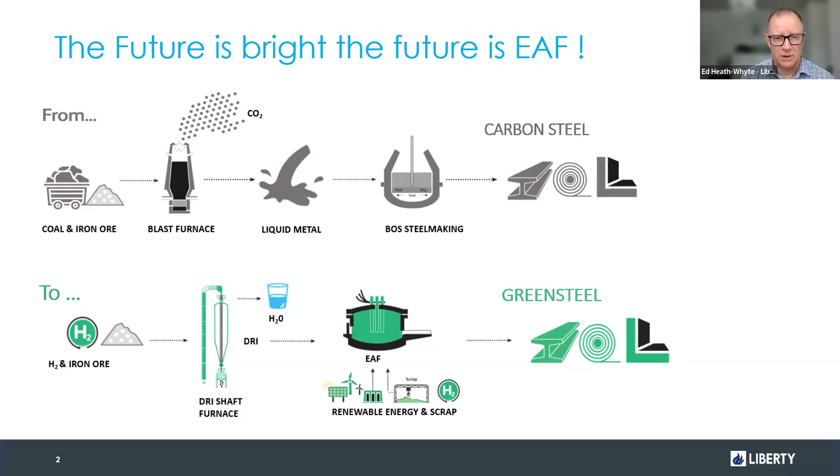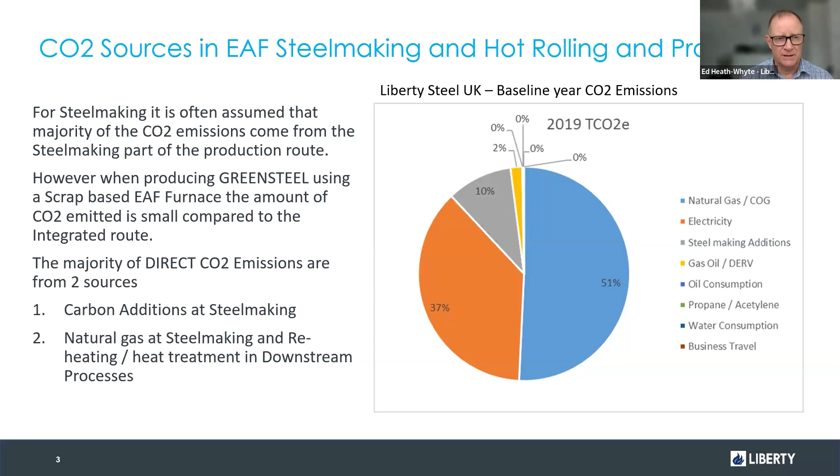So for Liberty Steel UK, our baseline year was 2019, and you can see there the sort of split of our baseline CO2 emissions. This is for steel making, but also our downstream processing in hot rolling mills. So 51% of our emissions were from methane, natural gas, and some coke oven gas. Then 37% electricity, so a scope 2 emission. And then 10% is the sort of steel making part of that, so the addition of carbon and alloys. But for the direct CO2 emissions, the two major ones are carbon additions at steel making and the natural gas used within the processes.

So the sources of CO2 in an electric arc furnace are obviously electricity, which is supplied by the national grid. That's an indirect emission. But for our direct emissions, we've got natural gas or LNG, oxy-fuel burners, ladle preheating, tundish and shroud preheating, and the cut to length in the bloom and billet.

And then we have some actual carbon additions, so the electrodes that are used to transfer the electricity for the melting. We make carbon additions of coke, coal, injection carbon and carbon wire, and also within the alloys we use - ferrochromes, ferromanganese - all of those have carbon within them as well. So within the mass balance of the steel making, we retain some of the carbon in the steel, but we also emit the CO2 from the process.

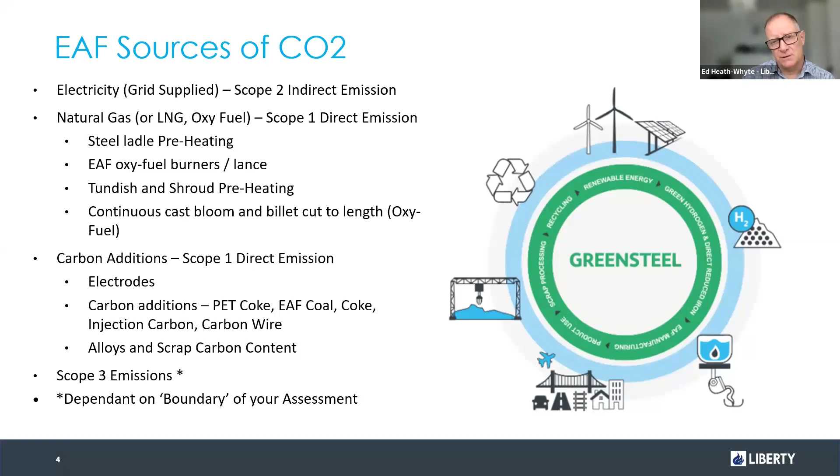And then as we process steel further downstream in our rolling mills, we reheat the steel up to 1300 degrees centigrade. We use reheating furnaces, soaking pits, walking beam furnaces, walking hearth furnaces. We do heat treatment of steel, we cut steel, and we use gas oil as a backup sometimes, although not so much anymore. So we have quite a large usage of natural gas, particularly for reheating steel, and that's not generally understood. People think it's all in the steel making, but actually the downstream processing has a considerable amount of CO2 emissions.

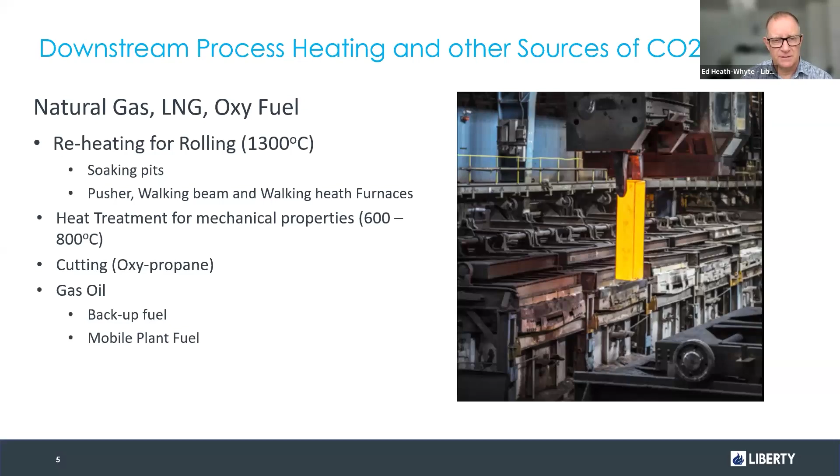So as a company, as a group, Liberty Steel Group have a climate neutral by 2030 ambition and strategy. And this is an illustrative approach to how we are approaching that.

So first of all, we'll tackle efficiency of process, making sure all of our processes are efficient in the use of energy and fuels. We'll fuel switch, from coke oven gas to natural gas, and that's happened. Then if there's going to be a new grid or grid mix, we'll switch to that. But we also look at where we're going to get hydrogen from. Our ultimate decarbonisation is to use hydrogen for our reheating and various processes already mentioned, and that will replace the methane. We're also doing things like using biomass or biocoke to replace coal and anthracite.

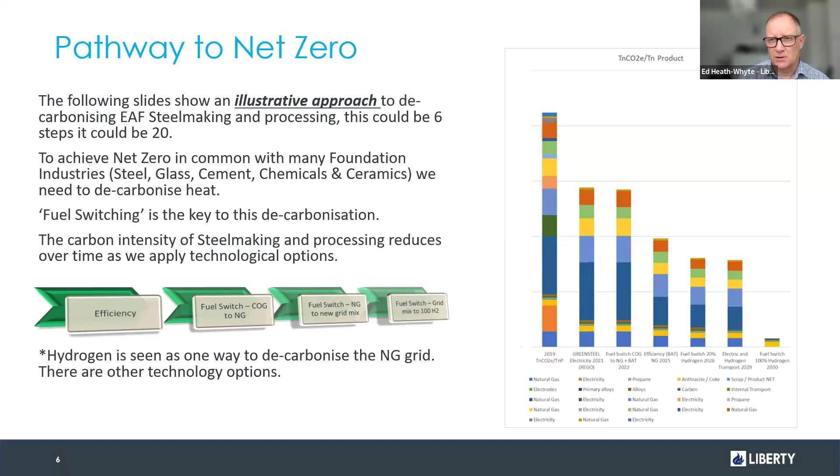So this is where the sources of CO2 come from, or was emitted from in the process. We have different sources of carbon, and these are all from our UK ETS registry. We calculate every year our tons of CO2, those are verified, and we report those through the emissions trading scheme. So we've got carbon additions, coke and coal - M1 and M7 - natural gas, propane, gas oil, electrodes, alloy additions, primary alloys, and a small amount of acetylene. You can see from all processes that natural gas is the biggest, and coal is probably the second largest, and for steel making similarly.

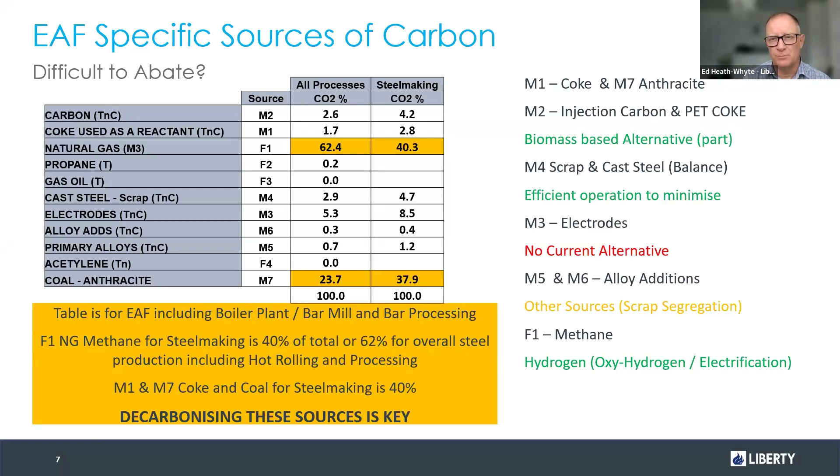So the key for us is to replace that methane, that natural gas, and that's what I'm talking about today. So the way we're going to do that is primarily through the use of hydrogen, but we will also electrify some processes.

This slide shows the East Coast Hydrogen Network. This is a project, and Cadent is one of the partners in this project, and we are one of the stakeholders. You might be able to see from the diagram that we are in between Rotherham, Doncaster, and Sheffield. So we are expecting to be on a hydrogen pipeline probably in the early 2030s, 2031, 2032, and we would expect to see pipeline hydrogen in that sort of timescale.

And that hydrogen, as it stands at the moment, will be produced on the East Coast, either from methane steam reformation or through electrolyzers through wind power. This diagram shows where the energy is coming from, from wind, but also where possibly any carbon storage could be done, or usage of that carbon to make other things. So that's what we believe our strategy is going to be at the moment. This is as far as we can see.

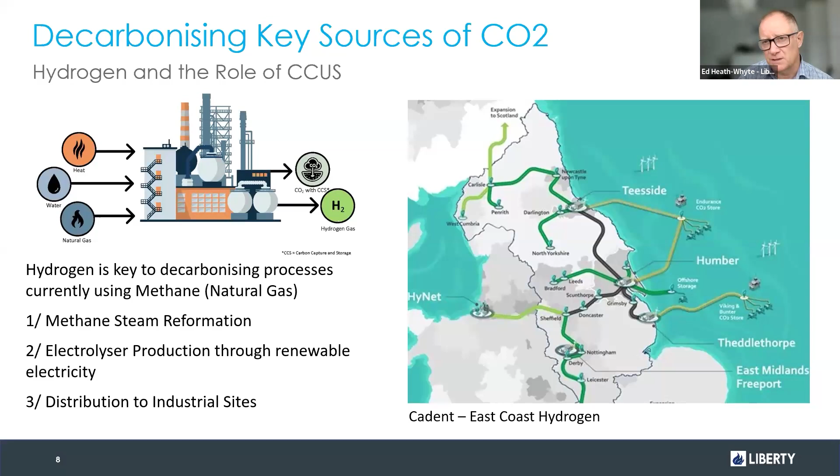And we need the actual, because the amount of methane we use, we really need it to be from a pipeline. We could do it on site, but that could be a big issue for us. It's not our core business to make hydrogen - our core business is to make steel - and therefore we prefer to get our hydrogen through a pipeline. So we expect that CCUS will be used in those processes that produce the hydrogen and then provide it to us.

However, we've also done some research through the SUSTAIN project. Professor Peter Styring and George Dowson have got this rig - I'm not going to go through all the writing - but it's a test rig in a trailer that was hooked up to our Brinsworth strip mill hot mill furnace. So we did a trial there, an industrial trial, just to prove this unit. It was the first trial of the unit, and we did this last year.

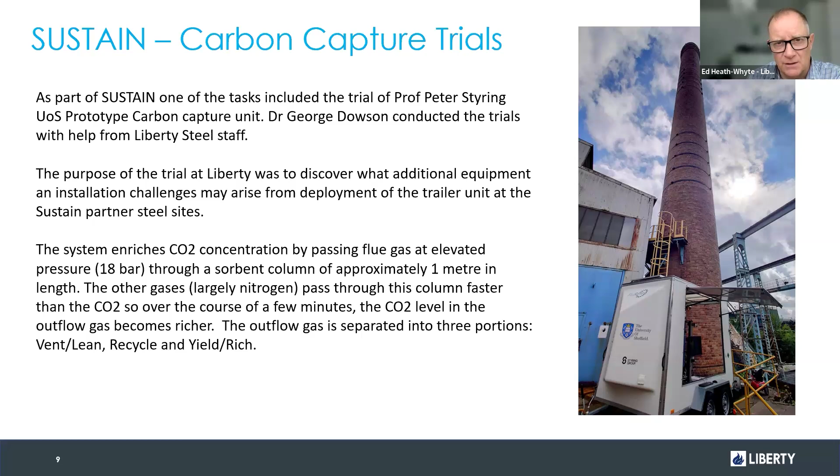So we were successful in taking the flue gases from the stack and passing them through the process. That provided quite a lot of learning opportunities for George and Peter in terms of how their rig operated and some of the issues they might have. We did find that the actual CO2 content was quite low in that stack, possibly due to air ingress between the stack and the furnace, but it was only about maximum 2% CO2. However, they managed to capture that and also concentrate it up to about 8%. So that was a successful trial of their process.

This enables them to develop the process further, and the test rig will go on to other steel sites in the UK to try other sources of emission, other sources of CO2 to capture. We believe currently that it's probably not viable to capture CO2 from reheat furnaces using methane, but that depends very much on the costs of the process and also the costs of hydrogen. So at the moment, what we're doing is ensuring that we understand both hydrogen to our sites, but possibly the use of CCUS on our sites as well.

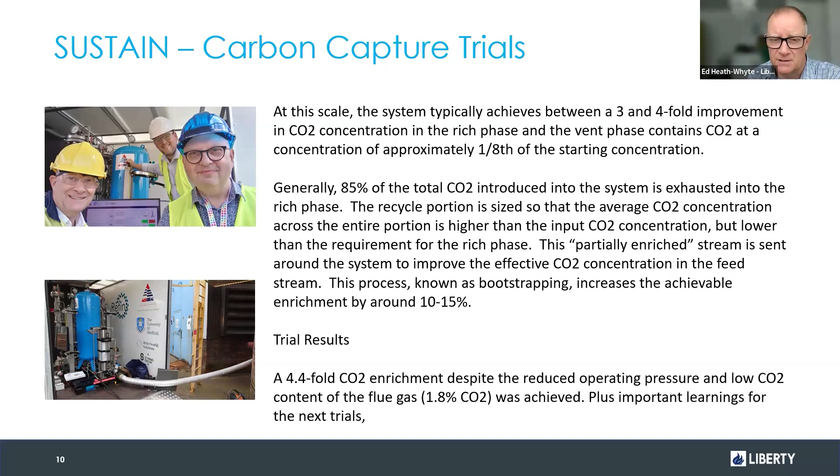That's it for me. Thank you very much. Any questions, I'll answer them later.

Brilliant. Thank you very much, Ed, for that introduction to the steelmaking process and the main areas where CO2 emissions are produced and some of the plans for the future. Just a quick reminder that if you've got any questions, please put them in the chat and we will get to them all in the Q&A section later on.

Next, I'd like to introduce Professor Enrico Andreoli from Swansea University.

Excellent, thank you very much. Hello everyone, it's a pleasure to be here today. As Becky mentioned, I'm Enrico Andreoli at Swansea University, and I'm currently heading the Department of Chemical Engineering. I'm also working with Sustain, involved as a co-lead of one of the tasks.

In today's presentation, what I want to do is cover the work we are doing and where we are heading. Since this is co-hosted by the UKCCSRC, I thought it was an opportunity in the second part of my presentation to cover a project we completed with their funding about scaling up the production of a specific carbon capture material.

What I'm going to do next is go immediately, apologies, I'm taking my laser pointer, to the first slide about Sustain. This is the team involved in emission management and utilization within Sustain, and you have seen already Professor Styring in his presentation just now.

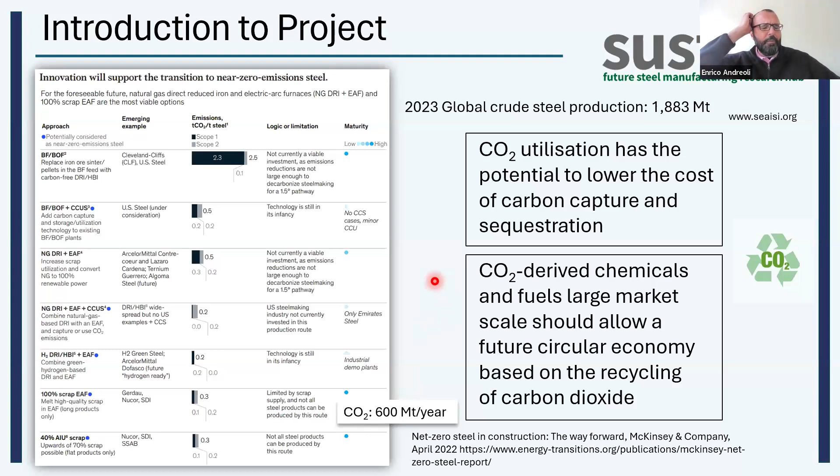And also create an economy centered, so a circular economy, where all the carbon material we depend upon, including fuel and chemicals, are made from carbon dioxide. With this in mind, within Sustain we are working on two strands: focused on making synthetic fuels from carbon dioxide from steel making processes, and also sustainable chemicals from the same gases.

So we want to take this carbon dioxide and generate either fuels thermochemically or chemicals electrochemically. The two are complementary approaches where CO2 is upgraded into a valuable product. The idea is to generate fuels for hard to decarbonize transportation, like aviation, and chemicals produced on a very large scale, like commodity chemicals. One indicated here is ethylene, for example, made in hundreds of millions of tons per year.

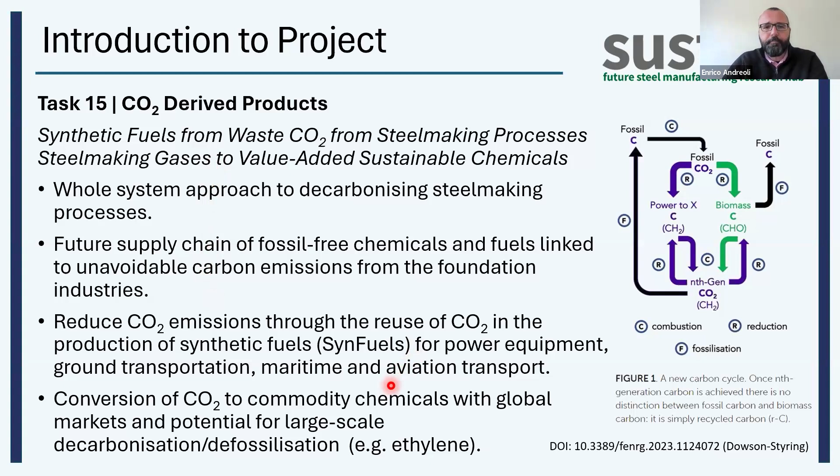Now I don't want to bother you or make it too complicated, but I want to give you a bit of a flavor of the work we are doing in terms of converting CO2 in Swansea. In Swansea, we focus on electrochemical conversion. What we do, in a nutshell, obviously oversimplified: we take CO2 with water.

This is a proton coming from water, and electrons, so electricity. We combine all of this together using an electrolyzer to convert CO2 into a series of products. One, for example, is ethylene. And ethylene is a building block of polyethylene, for example, produced, as I mentioned before, on a very large scale.

There are advantages in using electrochemical approaches. One for all is that we don't need high temperatures and pressures. There are others, but there are also disadvantages. One of these, for example, is that typically these processes are not too fast, so the productivity is not that high and not very stable. So we are approaching this problem, again, to take CO2 from steel making and generate products from it.

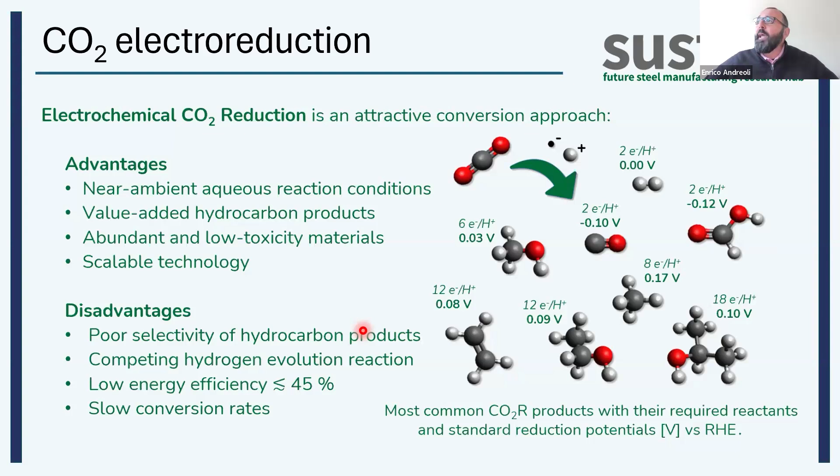Obviously, we have plenty of CO2 to deal with, more than we actually use. That's why we also need storage. And if we need to do electrochemistry with it, we want to learn from those who already do electrochemistry on such a large scale, and that is the chloralkali industry.

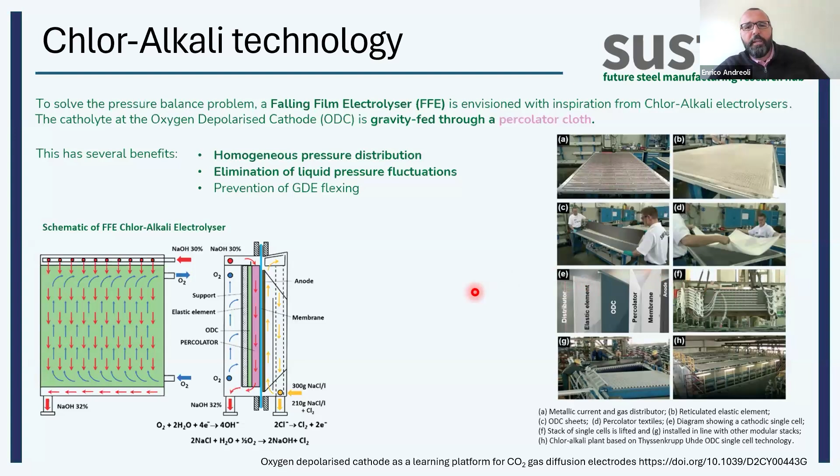It's called the percolator. The percolator allows electrochemical processes to operate at very large size—we're talking about square meter electrodes where the conversion happens. That's the direction we need to take also with CO2 electrolysis. We need electrolyzers of this size, very, very big electrolyzers. Currently the academic community is probably considering this, but we are at very early stages, and we want to take it forward to help scale up CO2 electrolysis.

The way we do it is by using what we call gas diffusion electrodes. These are electrodes that separate CO2 from the water that need to react together to make the products. So the CO2 permeates through this membrane, shown in gray.

The membrane has a catalyst on the right-hand side, and the process happens at this catalyst surface, and the products are made. Obviously, I'm oversimplifying everything. Hopefully you can still follow me as I explain how this works.

Now, if we do this on very tall electrolyzers, the water on this side creates pressure due to its own weight and density, and the pressure differentials across this membrane create big issues from an operational point of view, because the pressure is higher at the bottom than at the top, and this makes the process unworkable. The use of that cloth I mentioned before is actually the solution to this problem, to equalize the pressure and be able to do electrolysis on a very large size.

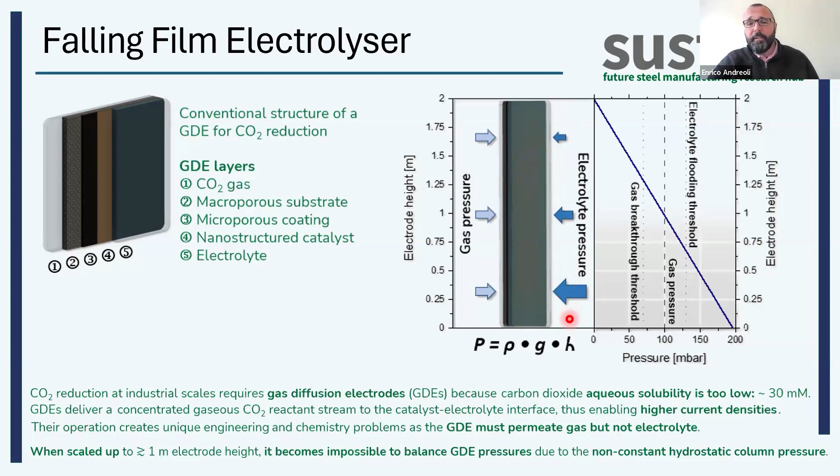So it's already in the lab. We are operating it as we speak. Shortly, we are testing the technology used in the largest electrochemical industry in the lab in order to translate it for the steel making industry.

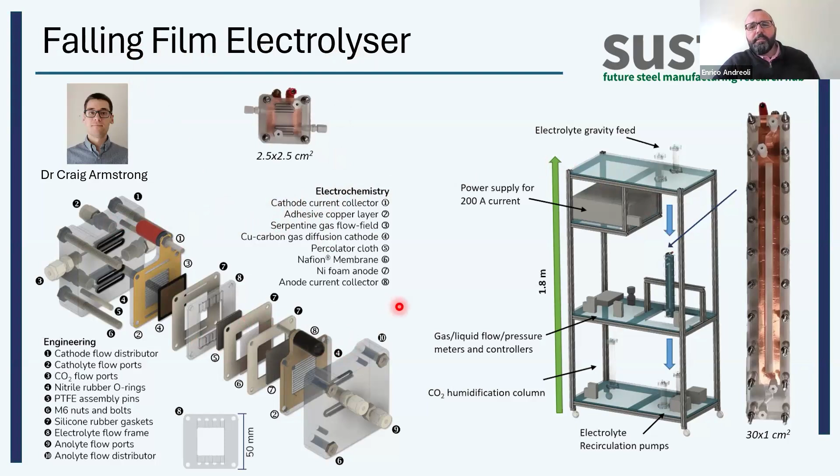So with this, I covered the first part of the presentation, where I wanted to give you a flavor of what we are doing in Sustain to address the electrochemical conversion of CO2 to create value from CO2 for steel makers. In the second part, quickly, I want to cover a project we did

with the UKCCSRC on scaling up a specific carbon capture material. You can see the name here. I don't want to bother you with all the details about the material — you are very welcome to contact me later if you are interested.

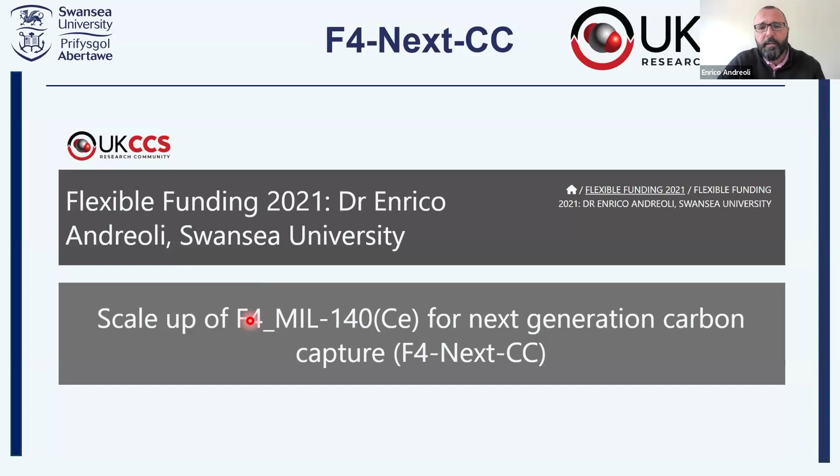But what we did was take this specific carbon capture material and scale it up at Swansea University with the following collaborators: ESRI, the Energy Safety Research Institute where I work, and Dr. Stephen Sheeran, who did all the experimental work; Associate Professor Marco Taddei at the University of Pisa, who developed this MOF with his collaborator in Perugia and was a Marie Curie Fellow with us in Swansea; and Immaterial, a Cambridge-based technology company specialized in MOFs, especially monolithic MOFs, who collaborated with us.

So what we did, very quickly, was produce this MOF — this yellow powder here. It's not really very complicated, it's a powder, and this powder can capture CO2. Obviously it's more complex than that, there are many factors to consider, but I try to keep it simple.

The powder can also be shaped into pellets, and it can be made very easily in water using relatively cheap chemicals. So we proved in the laboratory that what in engineering terms we call the space-time yield could reach a particular value of interest for industrial scale-up of production of this material.

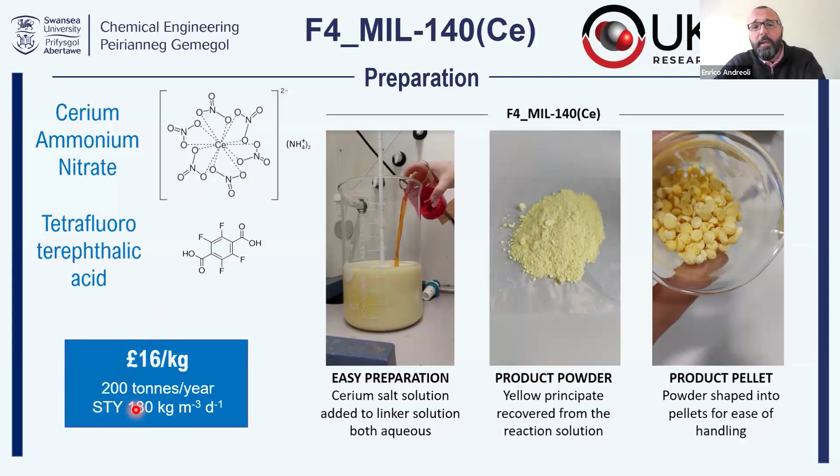So why this material in particular? This material, by the way — I have another slide here — can also be shaped in very regular forms. Shaping is very important from an applied point of view for carbon capture materials, and this was done with the visiting master's student Germán from IQS Barcelona. So the material can be made and shaped into a form that can be used for carbon capture.

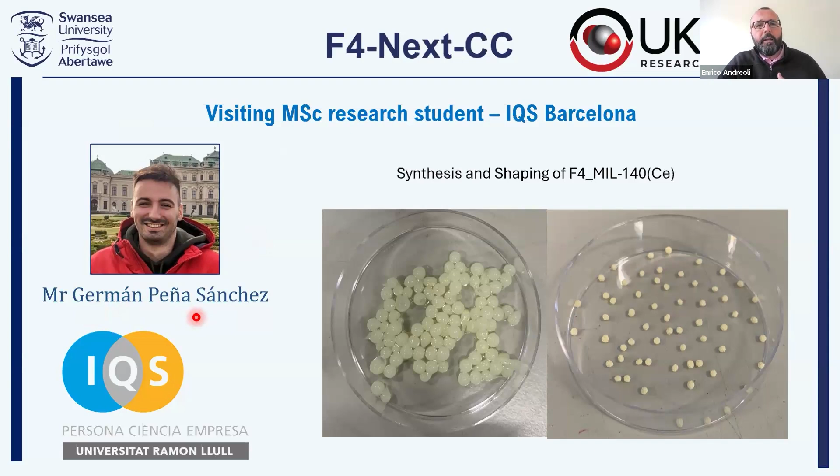And even more — now I have a slide of work that we haven't done in Swansea directly, but instead work from Marco Taddei in collaboration with Imperial College London, Professor Petit, and first author Dr. David Danaci. I decided to include this slide because this work, based on modeling, shows how the MOF that we developed and scaled up

performs when we look at its utilization in a particular setup called pressure swing adsorption, where we capture CO2 using changes in pressure. The CO2 is adsorbed at high pressure and desorbed at low pressure to be separated and obtained with a certain purity and recovery. The black curve in these two plots shows that, in terms of purity and recovery, this particular MOF performs better than other MOFs or commercial standards like zeolite 13X and activated carbons, compared to other materials.

Something to say: if you are interested, please go and check this particular paper, because there are many considerations to take into account. The message I want to give is that this, with a concentration of 25% CO2, is considered a simulated gas mixture of value for steel making decarbonization, because in a blast furnace, for example, CO2 is roughly 20%.

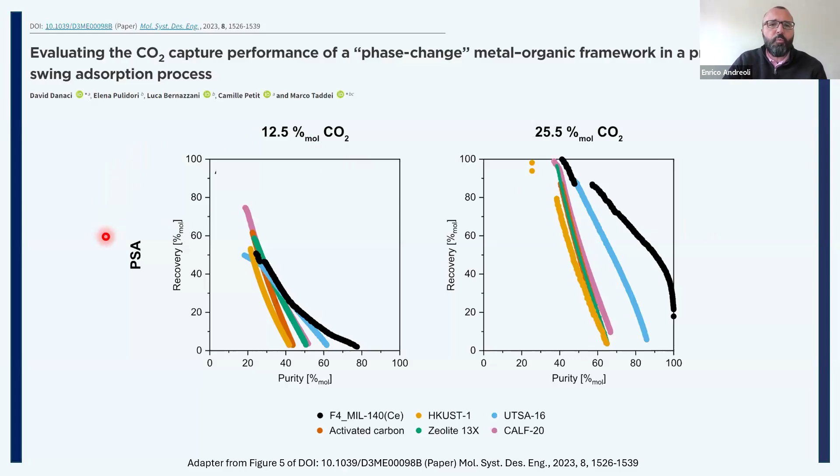Since I talked about PSA, I think I still have a couple of minutes. I want to close this presentation with some work we have done on developing a pressure swing adsorption demonstrator within another project, separate from Sustain and UKCCSRC, but very relevant, I think, for the audience today for industrial decarbonization.

The project was Reducing Industrial Carbon Emissions, funded by the Welsh European Funding Office and the Welsh Government, with Swansea University and the University of South Wales as partners, led by Professor Andrew Barron as PI. I was leading one of the work packages, where we developed this PSA unit.

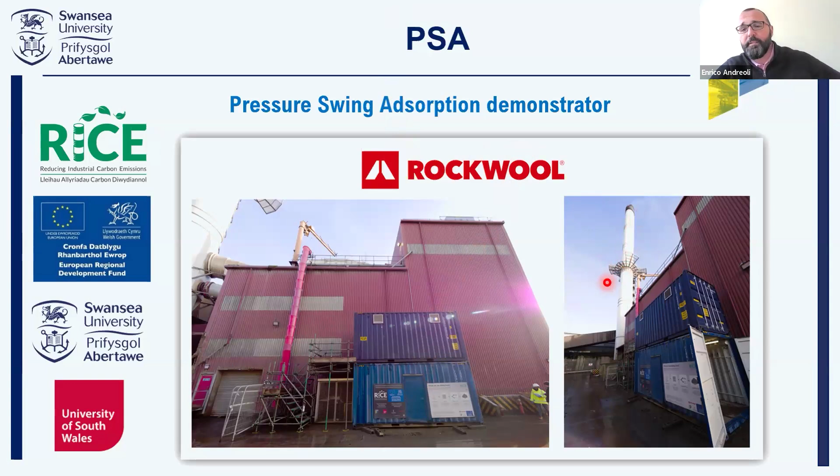The unit has been deployed at Rockwool here in Bridgend, not far from Swansea. So this is not a steel maker - they make insulation made of mineral wool for buildings. They are a leading company, globally a leading company in this. In these two blue containers that you can see here, we deployed the pressure swing adsorption, connected directly to the emissions of their cupola, where their product is being manufactured.

And this is a photo of the PSA unit. The reason why I'm showing it is we are testing it as we speak for emissions at Rockwool, and at the same time the unit is mobile and available also to other potential interested users to apply pressure swing adsorption to decarbonize their emissions.

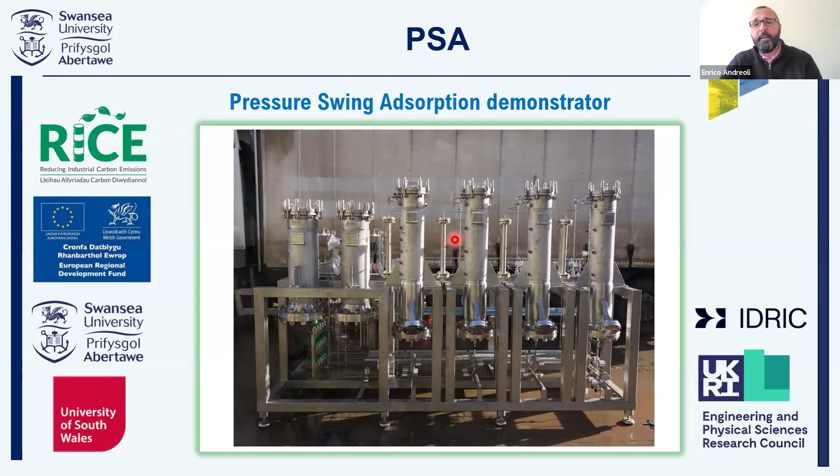The unit also allows testing of advanced materials in these four small bypass beds with a few kilograms of materials. I can show you some other pictures inside the container where it is installed, with the mass spec to control all the compositions, and a SCADA system for automatic control of the system.

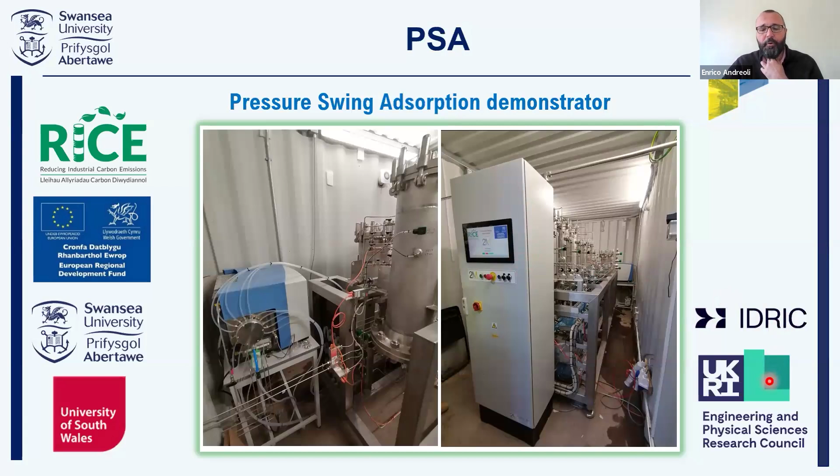Before I finish, I have to highlight that the project is still ongoing - after RICE with IDRIC funding first, and currently with Impact Acceleration Account funding from the EPSRC. With this I finish my presentation. I hope this was useful. We are working with Sustain, really focusing on decarbonizing industry, and I'm keen to hear from you if you have any questions.

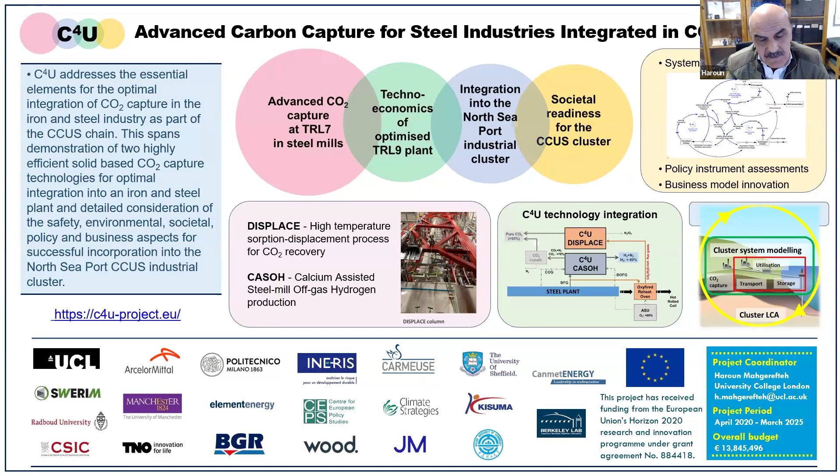Main objectives are, as I mentioned, to elevate these two energy efficient CO2 solid-based capture technologies known as DISPLACE and CASOH from TRL-5 to TRL-7, designed for optimal integration in the steel industry. My colleague Paul Cobden from Swerim will explain a little bit more details in a minute about these two technologies.

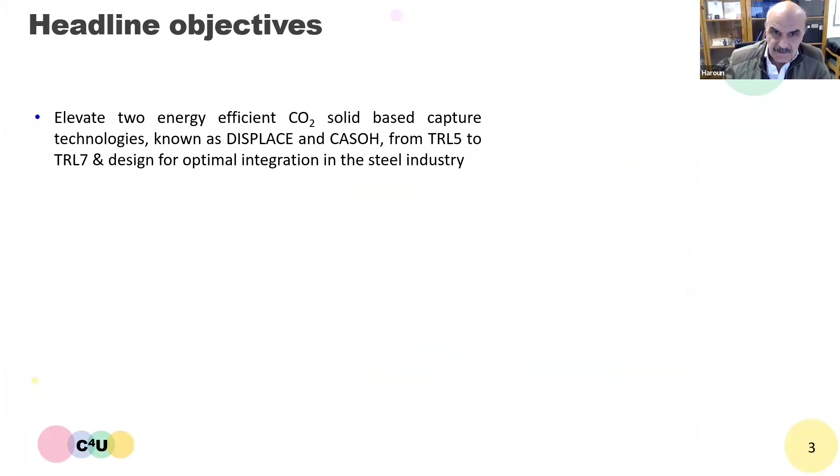Analyze the economic, environmental and business impacts and opportunities for integration of these two technologies at large scale, TRL-9, as an example, in a steel production plant in Belgium, the ArcelorMittal plant, which is part of an industrial cluster in the North Sea Port cluster, followed by ultimate storage of the captured CO2 in the North Sea.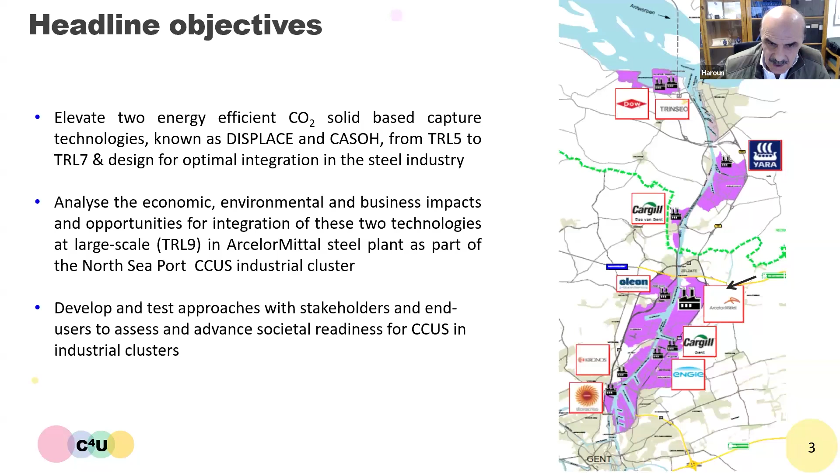Develop and test robust stakeholder and end user engagement to assess societal readiness for CCUS industrial clusters. And finally, as I mentioned, develop business models and policy instruments to facilitate stakeholder involvement.

Now, the steel production industry, as far as emissions are concerned, presents a unique, challenging technology case. You have several places from which CO2 is emitted. The majority comes from blast furnace gas, which accounts for approximately 65%, followed by coke oven gas, sinter plant, and several other emission places.

What is unique is not just the fact that emissions come from different parts of the plant, but also the concentrations and specifications of these CO2 streams are quite different. So it is quite challenging to develop a capture technology which can handle these different types of CO2, with different concentrations and different types of impurities, in one go.

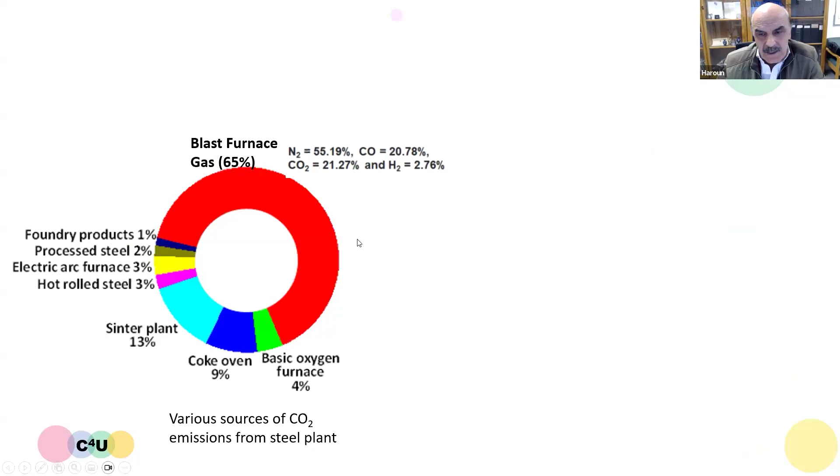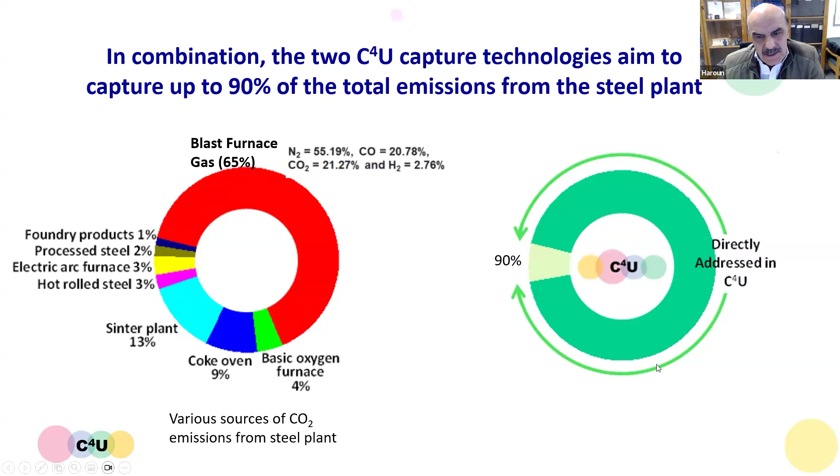Our two capture technologies are basically designed to be capable of capturing almost as much as 90% of these overall CO2 emissions from the different parts of the steel plant combined together.

This is a snapshot of our various work packages in the project. I won't bore you with it, I just briefly went through it. So there are 8 work packages in total.

Work packages 1 to 6 deal with the development of the technologies through to the long-term business models. And of course, as it is always a requirement, we pay particular attention to the dissemination, communication and public engagement of our project results.

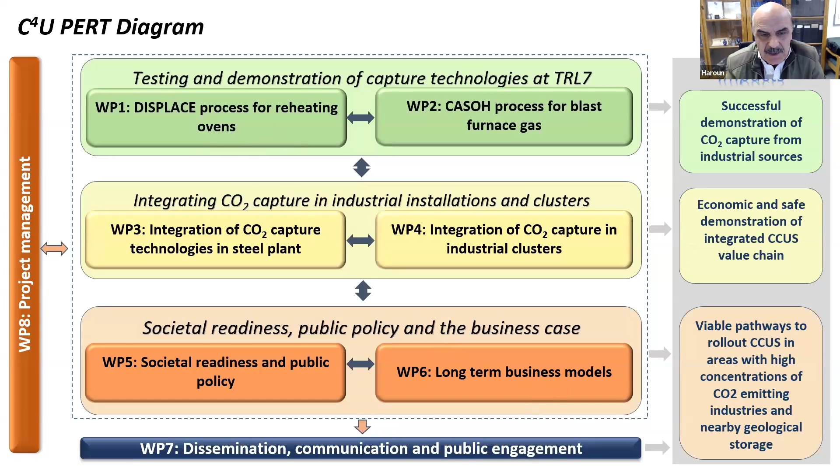So I pass over to Paul Cobden from Swerim, who is going to talk about these two different capture technologies. Over to you, Paul. Thank you, Haroun.

As our very first speaker told you, there's really quite a lot of different sources of CO2 in steel making, as Haroun has also just highlighted. So in order to decarbonize the steel sector, we're going to have technologies that look at all of these different types of CO2, or that can handle them. And so in this first work package with the Displace process, what we did was we looked at two very different manners of decarbonizing reheating ovens.

Reheating ovens are very typical units of operation, both in traditional steel making and also in EAF steel making. It's where you reheat the steel so you can form it and roll it and get the right kind of properties. In one case, we took blast furnace gas, which we oxyfired.

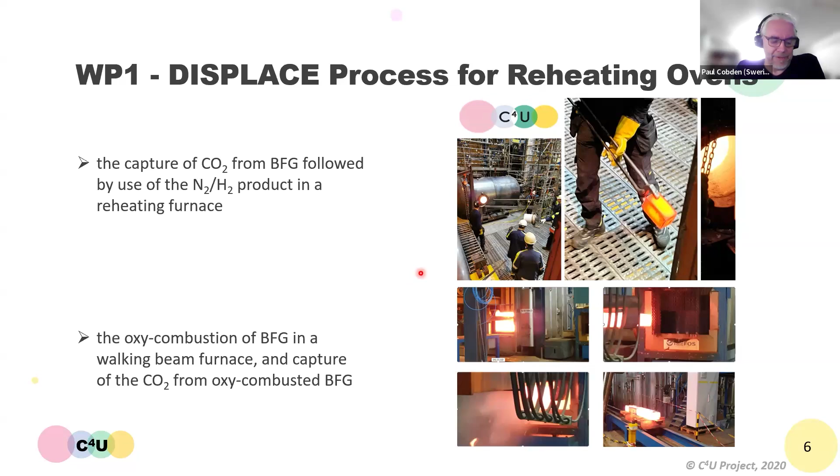And so these are just two of the proxies that we have in terms of the whole case for decarbonising traditional steel making, but they have a lot of connections to secondary steel making and the EAF steel making as well. Could we go to the next sheet, please?

So in this project, we have actually two different types of technology that we're trying to demonstrate. Here you see on the right-hand side, this is called the DISPLACE pilot. It's a 10-meter column, 60 centimeter diameter. It's filled with a material called hydrotalcite, which is an anionic clay operating at 400 degrees C.

Normally, we'd use that in a PSA type of mode, but in previous projects, we found out that there was also a mechanism that occurred on this material called displacement. And so we could use that to create blocks of CO2 and steam that move through the column. And doing that, if we have a block of steam coming out of the column, that means it's really quite easy to reuse that steam in another column. And this reduces the overall parasitic loss of energy because of CO2 capture.

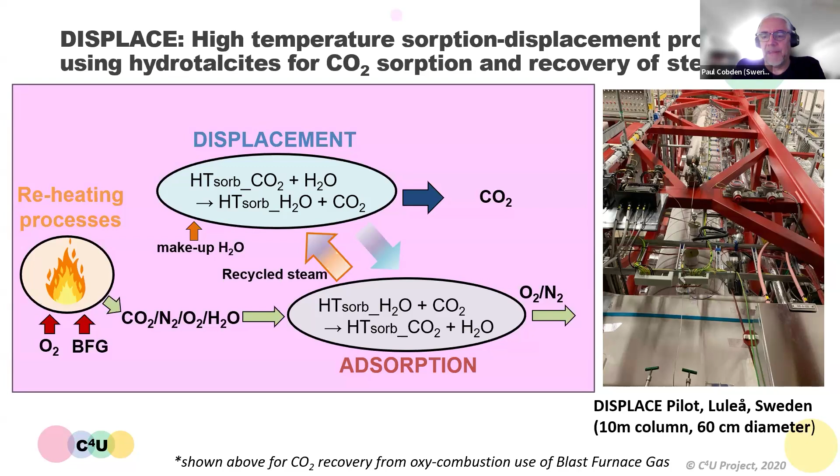So, I mean, all of these processes is about getting as an efficient process as possible. So recovery of steam at a relevant level is a really interesting thing to do. So I think it's almost a year ago now that we demonstrated the DISPLACE technology at this type of TRL5 type of demonstration, TRL7 demonstration. Can we go to the next sheet, please, Haroun?

So the second technology is called CASOH. It uses two materials, one being calcium oxide, calcium carbonate, the other being copper. There's a three-step cycle for this process. You see the pilot plant built in Asturias, Spain, at the ArcelorMittal plant there.

The special thing in this project is that if you need to decarbonize through calcium carbonate, you have to bring in a lot of heat into a process. And it just so happens that the reduction of copper oxide to copper using hydrogen is a very exothermic process. And this can produce heat right in the center of your reactor to decarbonize or to calcine calcium carbonate in order to make CO2 again.

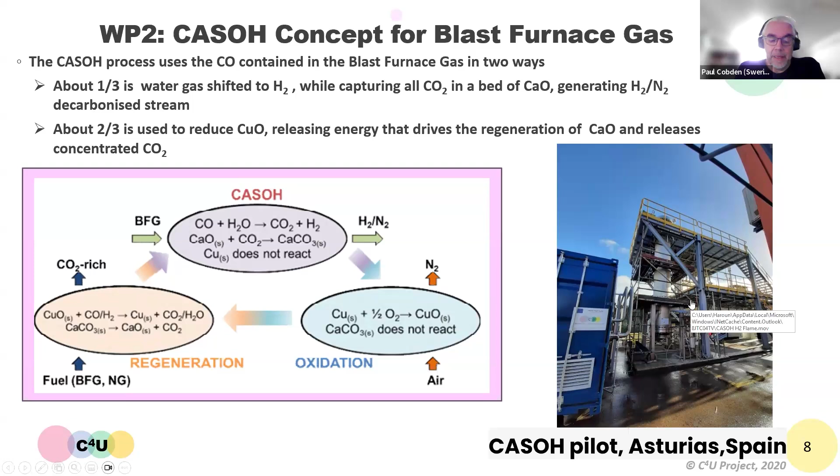So with a rather simple cycle with three steps, we're able to decarbonize a blast furnace gas and also produce this nitrogen hydrogen mix for use in, for example, reheating ovens. So I'll go back to you, Haroun.

Thank you, Paul. So just to recap, in the context of the advantages of two capture technologies, one of the main advantages is the very low environmental impact. Packed bed reactors with virtually zero emission of particulate matter and zero emission solvent volatile compounds. The absorbents are quite stable, with very little attrition through repeated cycles. The above features are in contrast to conventional CO2 capture technology in steel plants that use post-combustion scrubbing with commercial and new generation solvents, which are prone to degradation and may have significant environmental impact.

Moreover, another advantage is that our capture technologies produce valuable, as Paul mentioned, decarbonized products such as pure hydrogen that can be used to produce methanol, for example, or synthetic liquid fuels.

In the context of key performance indicators, classifying the context in terms of carbon captured, SPECCA, and CO2 avoidance costs compared to the two benchmark technologies, MEA and MDEA, we do considerably better. The percentage of carbon which is captured is expected to be up to 89%. SPECCA 1.5 megajoules per kilogram of CO2, and the CO2 avoidance cost is 41 euros per ton, as compared to benchmark technologies, which can vary between 65 to 50 euros per ton.

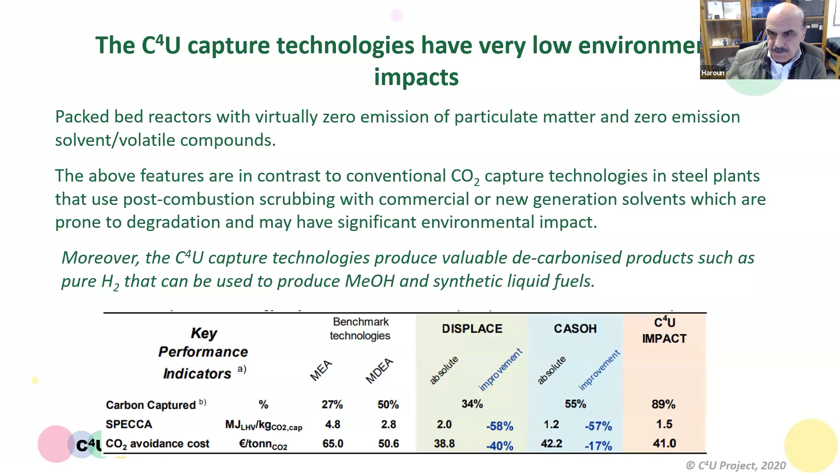We are, of course, interested in the scale-up of these technologies through their integration into a steel plant. For package 3, it focuses on the development of the process flow sheets for doing that, based on techno-economic assessment, and to result in the specified performance indicators that I mentioned.

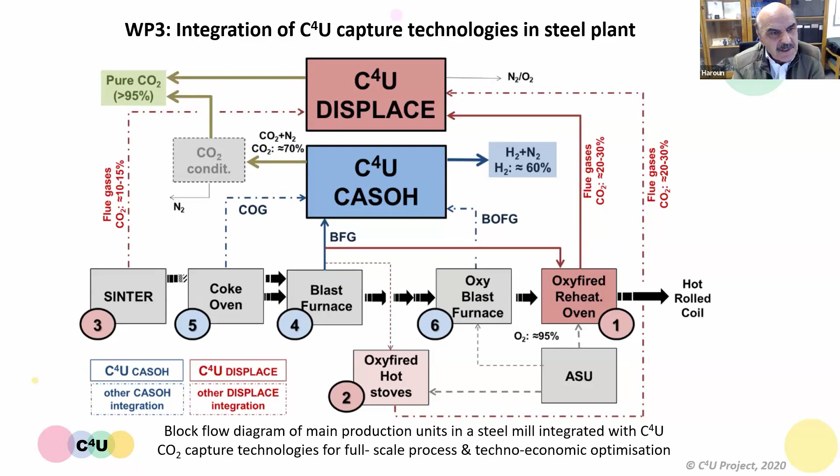For package 4, one of the main focuses of this work is also integration in industrial clusters. We all know that the most efficient way of decarbonizing CO2 emission industries is in the context of industrial clusters, where a common transportation network can be used to connect the different emission sources. With that, we chose the North Sea Port Industrial Cluster as an example, where the ArcelorMittal plant is located, along with several other CO2 emission industries ranging from glass, polymers, fertilizers, distributed in close vicinity with one another, forming an excellent example of an industrial cluster where the CO2 is captured from these different emission sources via a main trunk pipeline followed by ultimate storage in the North Sea.

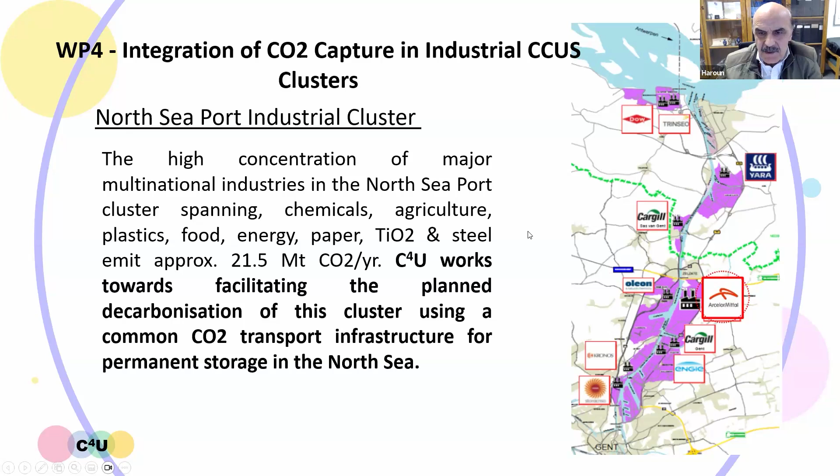One of the important aspects of our work is the development of a multi-source dynamic flow model to enable the control of the flow of these different CO2 sources which are captured into a common pipeline network. It is quite a complex scenario, given the fact that these CO2 sources have variable flow rates, different CO2 concentrations. So when it comes to mixing them together and followed by ultimate storage into the North Sea, for example, you need to know exactly what is going on, how the concentrations are changing. You need to be able to control the quality of the CO2 and the flow rate and make it continuous rather than interrupted. So developing a multi-source dynamic flow model where we can track these different factors such as CO2 concentrations and flow rates, and ultimately finding out what comes out at the other end at the storage site is one of the important aspects of our work.

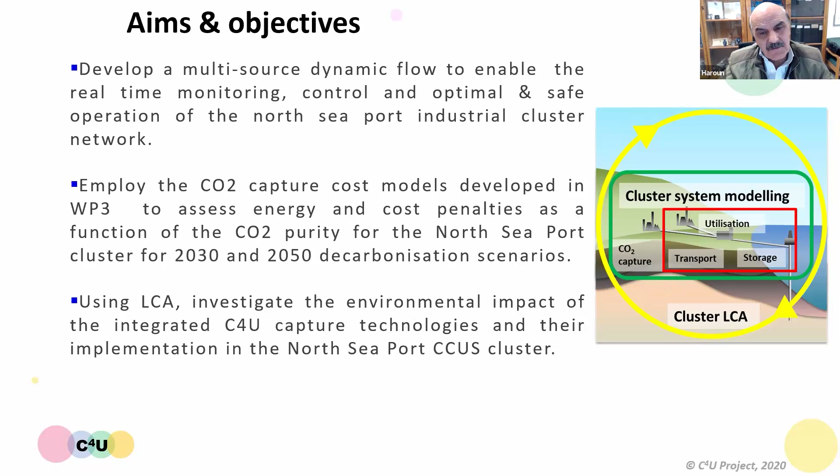This is also combined with LCA to investigate environmental impact of the integrated C4U. So when it comes to LCA, of course, there are several factors involved. You're using compressors, you use energy that is also equivalent to CO2. If you are going to build pipelines, you produce steel. To produce steel, you emit CO2. So you need to look at the whole package when it comes to basically quantifying the effectiveness of your work.

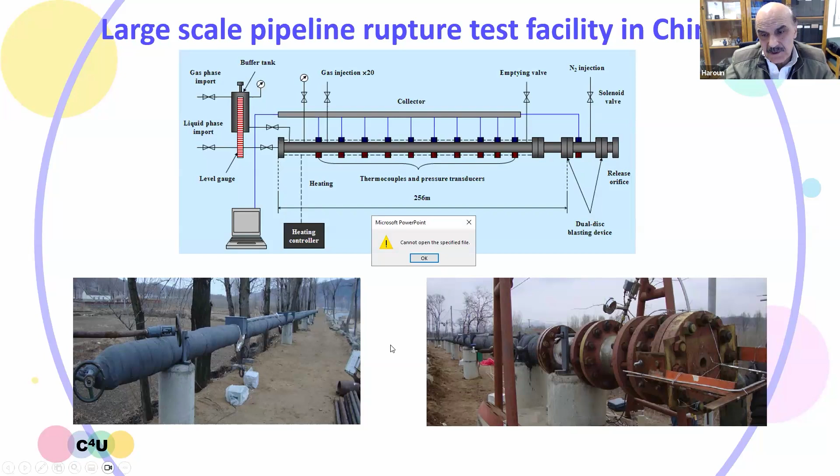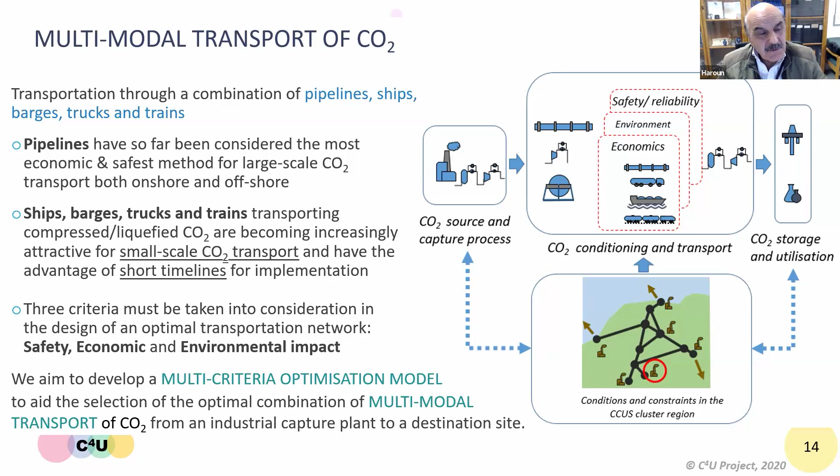Pipeline transportation is not going to be the only transport mode. When we are looking at CCUS in the context of industrial clusters, we also inevitably have to consider transport by ship, barges, trucks, and trains. So the development of a multimodal transport model for the CO2, where we come up with the optimum mode of transport involving these different transport modes, in taking the CO2, capturing it from these different sources, and ultimately storing or utilizing it at a point. One of the focuses of our work here is the development of this multimodal transport model, where we take account of the costs, the environmental impact, and also safety implications by allocating different indices, weighting factors to each, and coming up with the optimal mode of transport.

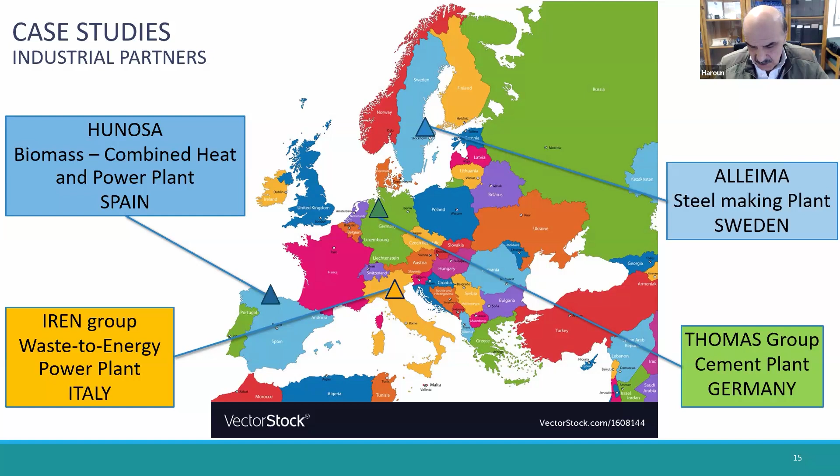We have selected 4 sites in Europe with different industries: in Spain, a biomass power plant; in Italy, the IREN Group waste-to-energy power plant; a steelmaking plant in Sweden, Alleima; and also a cement plant in Germany, where they are all looking at the capture of the CO2 followed by storage. We are applying our multimodal transport model in order to come up with the optimal mode of transport for each one of these different emitters, given the geographical locations and the topography around the plant.

And finally, societal readiness and public policy are of essential importance. Without industry societal readiness, societal support, CCUS won't go far. So you need to understand the needs of society in order to address their concerns, and also take on board the safety aspects to make sure that there are no environmental implications, and ensure safe operation.

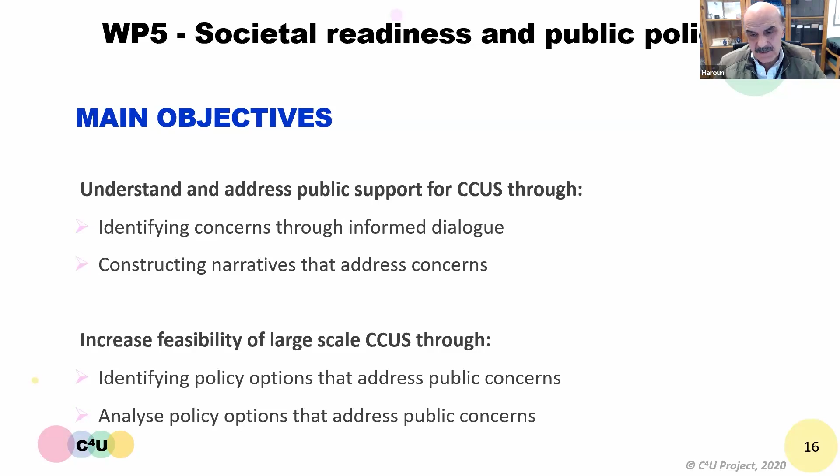And finally, the development of long-term business models. CCUS is expensive, basically. It's not a money-making business, so we need to have business models where we can get different stakeholders involved, based on different stakeholder involvements, to facilitate investment.